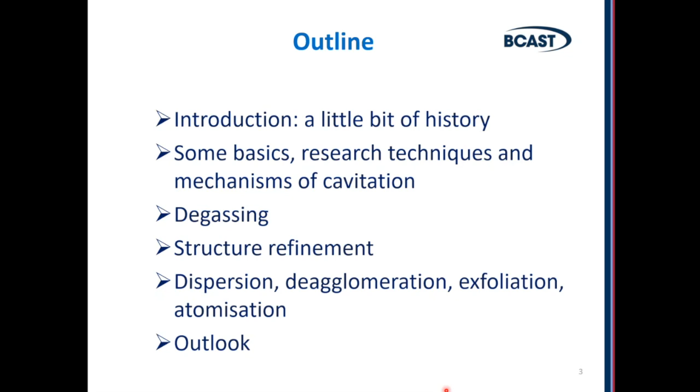Ultrasonic processing is a historic subject, studied for quite some time, but in the last 20-30 years there has been increasing interest in this technology because it offers sustainable, eco-friendly means of achieving goals which are typically achieved through additions or through introduction of some gases. So it gives you an eco-friendly way of tackling industrial problems.

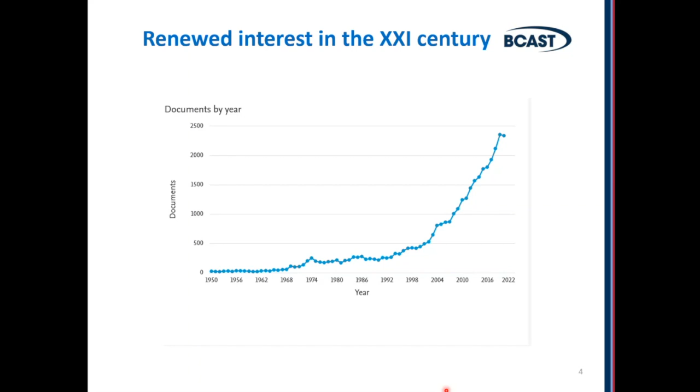At the heart of ultrasonic processing is cavitation. Cavitation, by definition, is the creation of cavities, and when we talk about liquids, it's the creation of cavities in the liquid. When the static pressure on the liquid reduces below the liquid vapor pressure, small vapor-filled cavities are formed in the liquid.

There are two major types of cavitation in liquids. One is hydrodynamic cavitation, which is famously known for damaging impellers of ships. That's usually when the water or liquid comes across a solid-liquid interface with very high speed, and at some critical speed there is a disruption, so the water cannot flow over the interface anymore, and it starts to disrupt this interface, creating bubbles.

This hydrodynamic cavitation is also used in useful applications, for example in atomizers, emulsifiers, and some mixers. Acoustic cavitation, which we mostly deal with, is a result of alternating pressure created in liquid by passing a high-frequency acoustic wave through the medium.

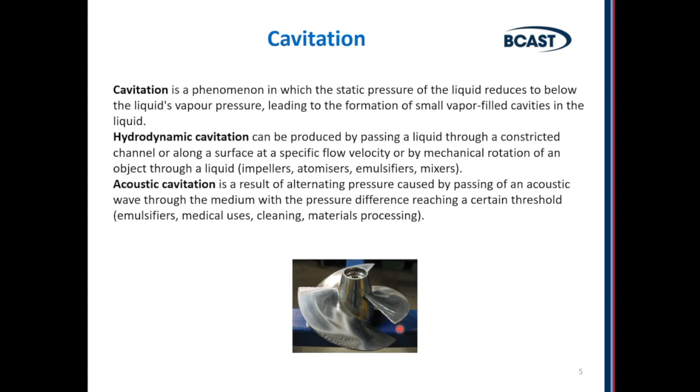This is a scientific field with a very rich history. Fundamental and practical works on ultrasonic cavitation and its applications date back to the 1930s, even the 1920s. Notably, already in 1954, there was a literature review published on the applications of ultrasonic processing to metals. And in 1981, another review was published by John Campbell on the application of vibrations to melt processing.

My father worked a lot in this field, and he published his first monograph on this area as applicable to aluminium in 1965, and since then a number of other monographs were published. So it's a historically very rich area.

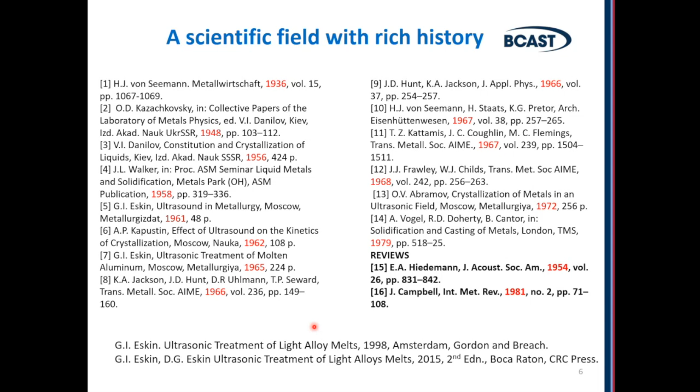So what can we expect when we talk about ultrasonic cavitation? You have a vibrating source here, which vibrates in this direction at high frequency, usually above 17 kilohertz, and when it reaches a certain power, cavitation starts. Cavitation is concentrated near the tip of the source, but it produces bubbles and a lot of mesoscopic, microscopic flows. So you can see that it creates mixing, vigorous movement of liquid, and special phenomena in the cavitation area itself.

You can see it produces noise, high frequency noise. If we talk about specific areas, we usually talk about the cavitation region, which is directly underneath the source of vibrations. It's usually roughly the size of the diameter of the probe or sonotrode, sometimes a little bit larger than that. And then there are downward flows which recirculate.

So this is experimental observations. These are PIV measurements, particle image velocimetry measurements of the velocities. And velocities in this area of the secondary flows are in the range of centimeters per second.

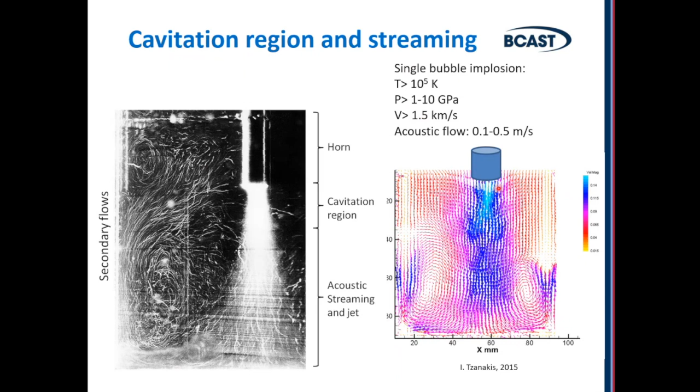And when it implodes, it creates in the center a huge pressure, which also results in a huge increase, but very short in time, in temperature. And the velocity of this implosion is around 1.5 kilometers per second. So this happens on the scale of a single bubble. But in the bulk volume, the velocities of the flow are much slower.

So what actually happens when we talk about ultrasonic processing? There are a lot of phenomena which are interesting and relevant to processing itself. First of all, we have cavitation and acoustic streaming, which was illustrated in the previous slide. And we can observe it in transparent liquids, now also in intransparent liquids using synchrotron, and we can do modeling.

Then we have the cavitation zone, which nowadays we can also observe. And we can also measure acoustic pressure in the cavitation zone and outside the cavitation zone, measuring the attenuation, because of course acoustic pressure is maximum close to the source of vibrations, but then it attenuates through the volume.

Then there are phenomena which are associated with this cavitation. First of all is degassing. So liquid usually degasses - when these bubbles are formed, they're filled with gases which are dissolved in the liquid. By that, a liquid can be degassed of dissolved gases, for example, oxygen in water or hydrogen in aluminium, and that we can measure and observe in transparent liquids.

Then it activates - cavitation activates inclusions, which creates better wetting conditions on the surface of inclusions present in the melt, for example oxides.

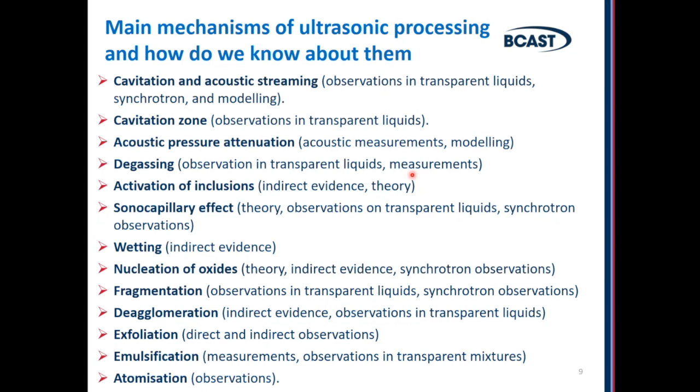In liquids, immiscible liquids like oil and water, for example, can emulsify very efficiently under conditions of cavitation, and you can also have atomization of liquid when it drops onto this vibrating surface. So these are all the phenomena and mechanisms which we use in materials processing using cavitation.

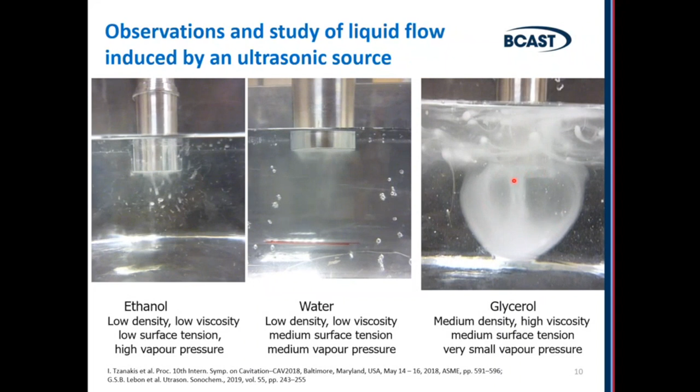So cavitation looks different in different liquids, depending on the properties of the liquid. With big bubbles, there is no well-defined cavitation zone and flows, unlike what we saw in water or liquid aluminium, where you have a very well-defined cavitation zone and flows, versus very slow processes in highly viscous liquids.

We can not only observe cavitation in different liquids, but also measure acoustic pressures using cavitometers. This is a special device which transforms mechanical vibrations of the probe into an electrical signal, and then this signal can be converted using fast Fourier transformation into a spectrum, and then calibrated to real pressures.

We can do this in water, and we could for a long time do it in low temperature liquids like water since the 1950s. But nowadays we can also do it in liquid aluminium using metallic probes. This is an example of such measurement showing attenuation of pressure in liquids. Moving from the tip of the probe, or sonotrode, to the side, you have attenuation of pressure. But you can also see that 100% power, maximum amplitude of vibrations, is not necessarily better than a smaller amplitude.

That's because you have not only attenuation of acoustic waves in the liquid, but also shielding of acoustic waves from the melt by the cavitation zone. You can imagine the cavitation zone as a zone with a lot of bubbles, so you don't have a continuum liquid medium anymore, but a bubbly liquid. Bubbly liquid attenuates, or absorbs, acoustic energy very quickly. So if you have a very well developed cavitation zone, a lot is happening inside, but not much going outside this zone. All the energy is consumed within.

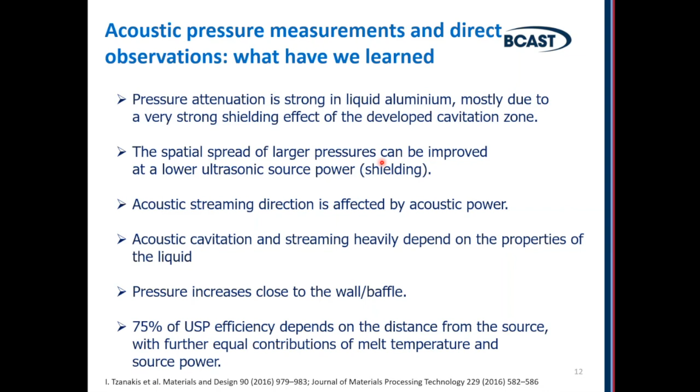We may have a very strong shielding effect if the cavitation zone is very well developed. We now know how this shielding and attenuation happens in real liquid melts, and we know that acoustic streaming, these secondary acoustic flows, are affected by acoustic power. We can draw a lot of practical solutions from these measurements which we can apply in liquid metal processing.

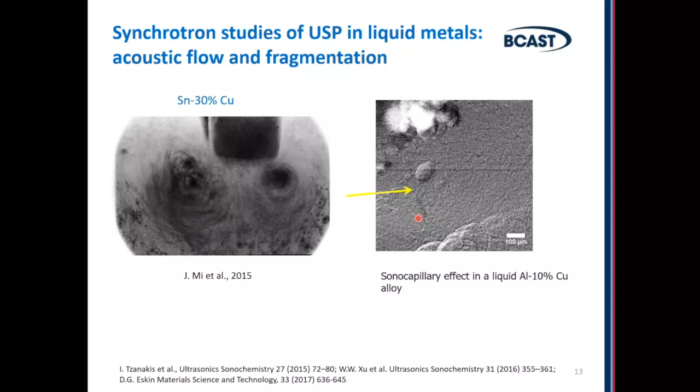So we have now reached the means to study cavitation processes.

Sorry, what I did—I pressed end. It's not end yet, let me go back. I'm very sorry, I pressed the wrong button. I will just need to go. Oops, what happens?

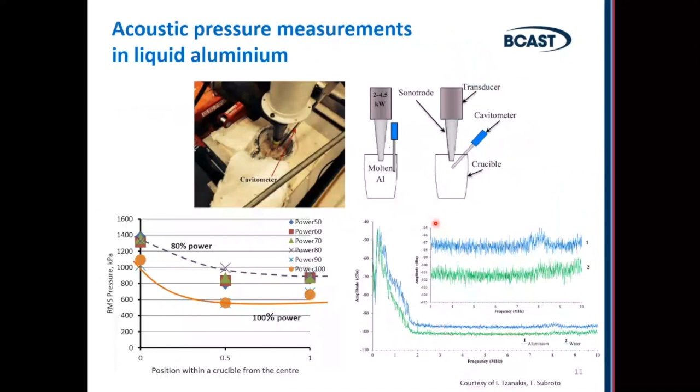From these in situ observations we learned a lot. We've confirmed some concepts we knew before, like the sonocapillary effect, but we also observed shock waves in liquid metals, and liquids generally, for the first time. We can also see how cavitation interacts with solid particles floating in the liquid, and what we can expect from this interaction.

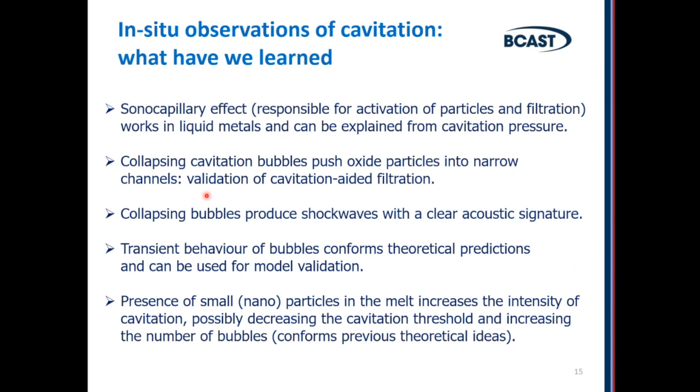One of the major applications of ultrasonic melt processing, as applicable to liquid metals and specifically aluminium, is nucleation. We want to refine the structure of the solid metal by assisting nucleation of solid phases during solidification. Of course it starts from nucleation—the more nucleants you have, the finer the structure. So there are a number of hypotheses and theories on how cavitation can assist nucleation.

One fundamental idea is cavitation-assisted homogeneous nucleation. As I said before, when a cavitation bubble collapses it produces a lot of pressure inside, and this pressure creates undercooling. The increased pressure upon bubble collapse increases the melting point of aluminium by about 60 kelvins, which means that effectively, relative to the ambient temperature of the melt, it is locally undercooled by about 60 degrees—which is a lot. That creates homogeneous nucleation sites.

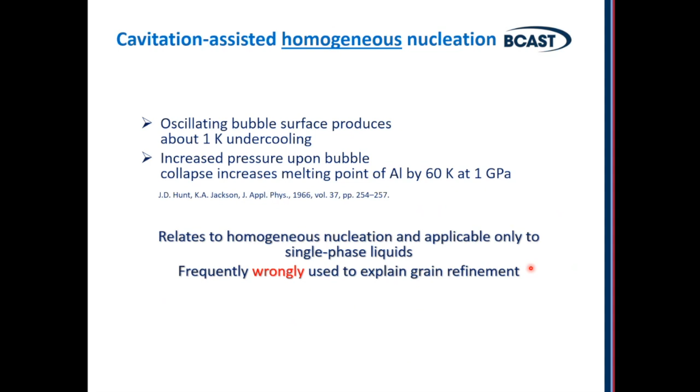But in liquid metals, homogeneous nucleation almost never happens, so you cannot use this explanation for explaining grain refinement in real melts. So here we talk about heterogeneous nucleation, which happens on substrates present in the melt.

Typically, if we talk about aluminium, but also steel is the same, these are oxides, carbides, borides with sizes of a few microns. What cavitation does is first clean the surface of these particles from whatever contamination is there, and also, very importantly, from adsorbed gas on the surface, allowing access of the liquid metal to the surface of these particles.

It also promotes wetting and filling of small surface defects via the sonocapillary effect. These wet particles, especially if they have a good crystallographic match with aluminium, become active and can serve as a substrate for the solid phase to be formed.

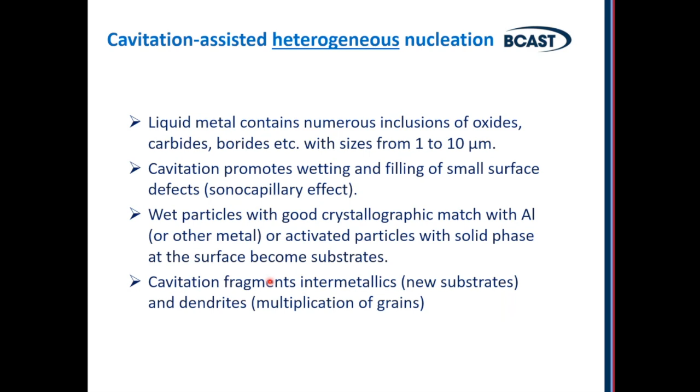On top of this, cavitation fragments intermetallics and dendrites, and by that creates new grains, new substrates, which also assists in grain refinement.

Activation of substrates is very difficult to observe and prove experimentally, but indirectly we can say that frequently, if we treat our melt above the liquidus in a relatively wide temperature range and then solidify the material, we frequently find oxide inclusions inside intermetallics, which indirectly shows that these intermetallics were nucleated on these oxides.

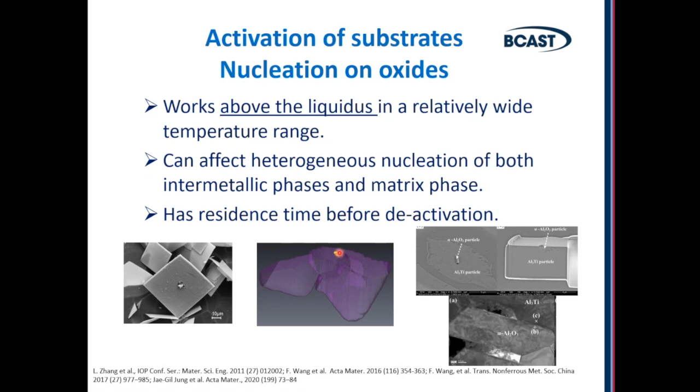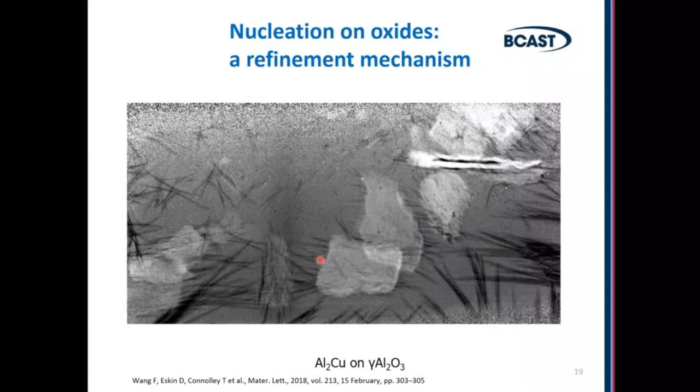We also have very interesting evidence from synchrotron studies where we see that intermetallics of aluminium and copper are nucleated on aluminium oxide after the melt was processed with ultrasound. This is direct evidence of nucleation on oxides. If there is no cavitation treatment before, these oxides remain inert, they are not wetted by liquid aluminium, and so there is no nucleation.

Fragmentation is another powerful means of grain multiplication, grain refinement. It always works, but only below the liquidus, because in order to fragment something you need to have that solid phase present. So if you talk about fragmentation of aluminium dendrites or intermetallics, you need to do it in the temperature range where this solid phase already exists.

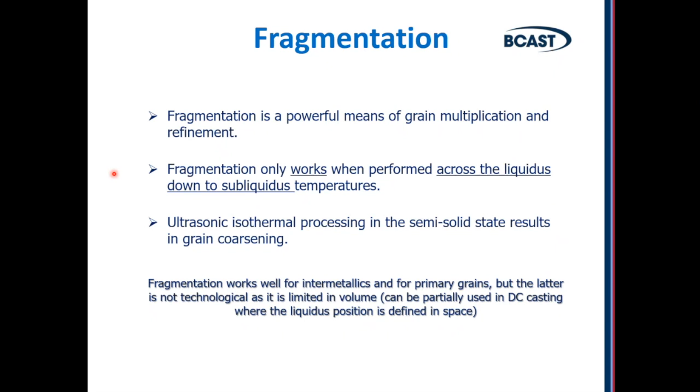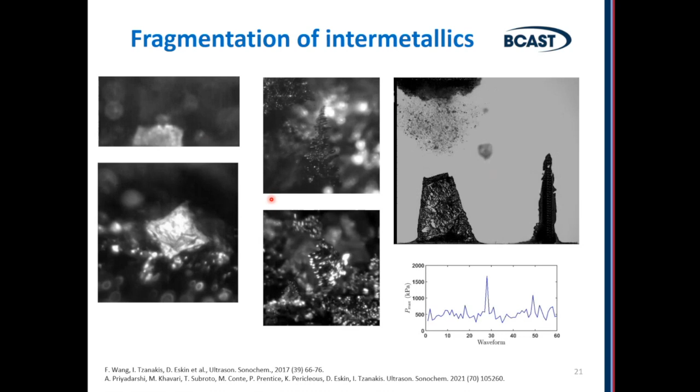And it works very well. We had a lot of in situ observations of how cavitation can fragment intermetallics—you can see here and here, basically by crushing it. The only interesting thing is that it doesn't happen instantaneously; it's actually a kind of fatigue mechanism, a high frequency fatigue mechanism.

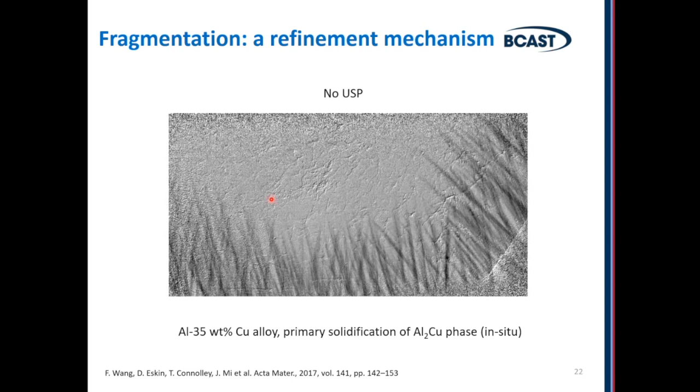This is an example of an aluminium copper alloy studied with synchrotron imaging. Without ultrasonic processing, you can see huge elongated, needle-like intermetallics formed. When you do ultrasonic processing, with the ultrasonic source here, the flows detach some of these intermetallics and bring them back into the cavitation zone. We don't see the cavitation zone in this frame, but they're going to the cavitation zone here.

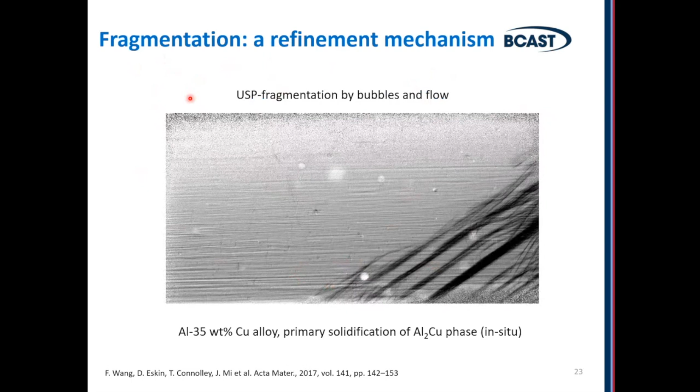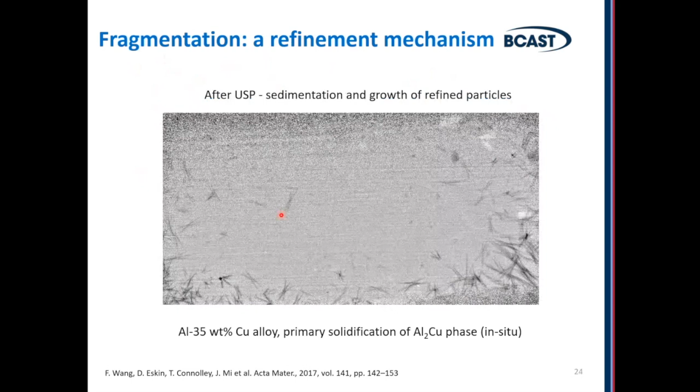Then when you switch off ultrasound, that's what you have: these fragmented intermetallics sediment and create a much finer structure. That's what happens also in real alloys when we process them with liquid metal ultrasonic cavitation.

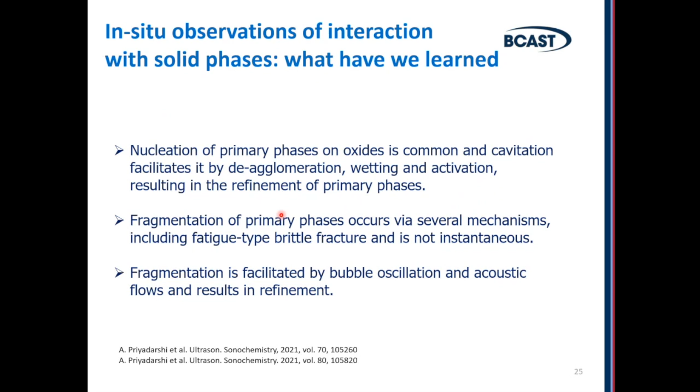So we learned a lot from these in situ observations. Some of these observations are quite unique to date, but we learned a lot, and we continue to work in this area. It's a very scientifically rich area of research. Another thing is deagglomeration.

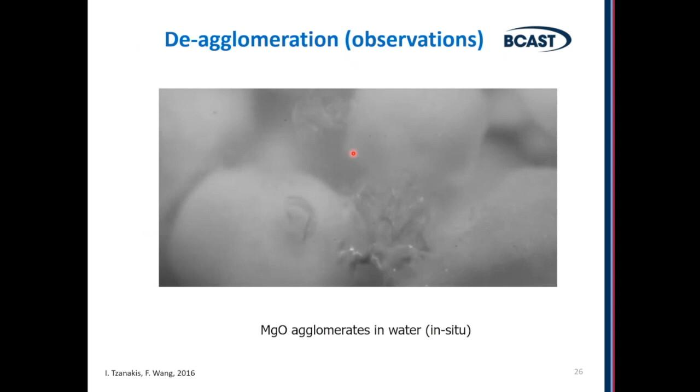If you have agglomerates of particles, like when you add particles into liquid aluminium to make a composite material, they tend to agglomerate. What cavitation does is the cavitation bubbles scrub the surface of these agglomerates and deagglomerate them. So instead of having big chunks of agglomerates, you have individual small particles released into the liquid.

What is important is that because it's a gradual process, it takes a long period of time. So if you want to make nanocomposites by adding nanoparticles into aluminium melt, you need to allow some time, 10, 15, 20 minutes, for the process to happen. If you try to do it in 10 or 15 seconds, you will not be able to achieve the result because of the mechanisms of deagglomeration.

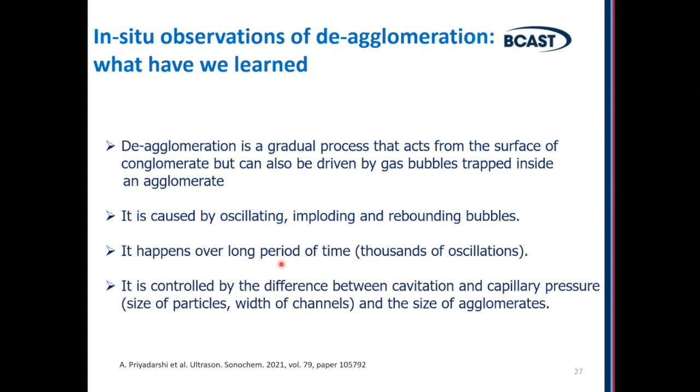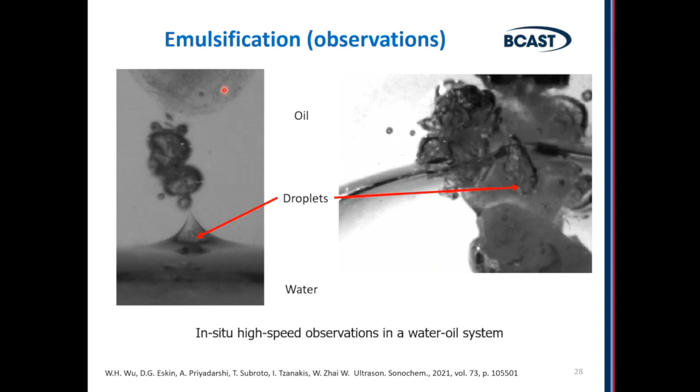We also have emulsification assisted by cavitation. Here's an example of oil in water—you can see the cavitation zone here spreading. This is a very high-speed observation, and here the emulsions start to form.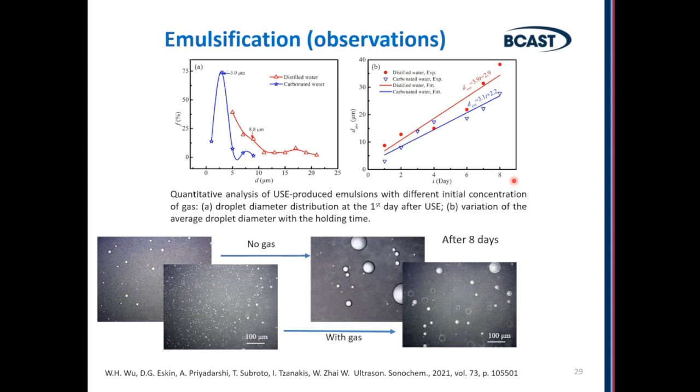Here, emulsions start to form. We also looked at the positive effect of dissolved gases, which will enhance cavitation, and also by that enhance emulsification.

Another very interesting recent application of ultrasonic cavitation is exfoliation, for example making graphene. We had a good project on that, and we observed and achieved very efficient exfoliation of graphene in eco-friendly solutions like water, or water ethanol solution, which makes this graphene suitable for biomedical applications.

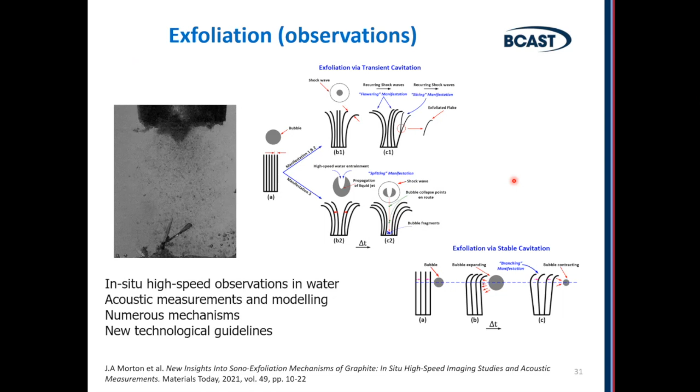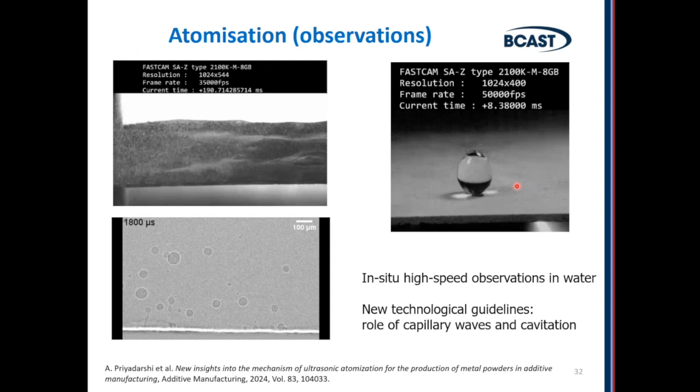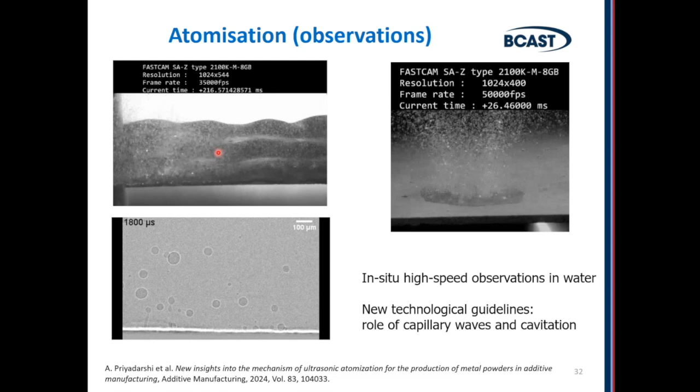Yet another application is atomization, which may be interesting for people who work in additive manufacturing, because ultrasonic atomization is one of the means to produce good quality powders for additive manufacturing. Here you can see a vibrating plate, and how droplets or layers of liquid metal, or liquid, in this liquid, atomize when it touches the vibrating surface. There are mechanisms associated with that. We published and are currently publishing papers on this, which is quite a scientifically rich area.

Let's now talk about applications. So we talked about mechanisms, some fundamental mechanisms. What are the applications of ultrasonic processing? Again, there is a history behind this.

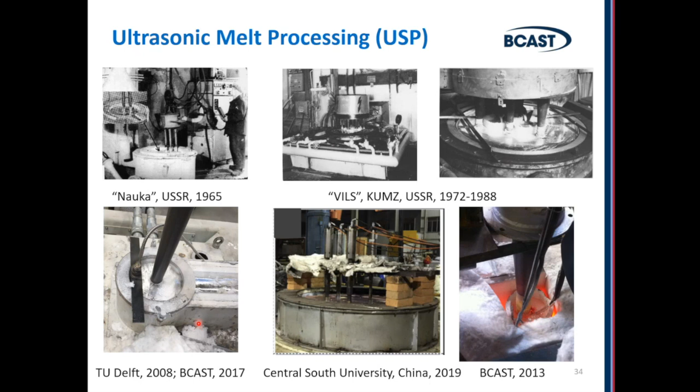We know that there were examples of industrial scale applications in the 20th century: 1965 degassing, and in the 1970s and 80s application to large scale direct chill casting, producing billets and ingots from aluminum alloys. These works continue now in China, for example. This example shows very similar experiments in DC casting in China. We work more on fundamentals of this, or technological development of this processing, so smaller scale, but we do this research in BCAST here, also during DC casting.

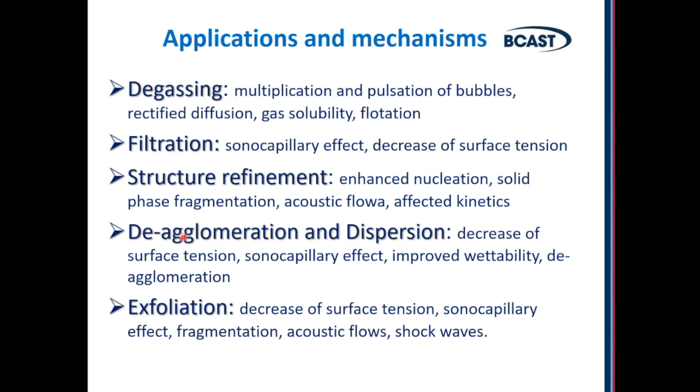So what are the applications of ultrasonic processing to processing liquid melts? Degassing, filtration, structure refinement, deagglomeration, dispersion, especially for making composite materials, but also for improving the efficiency of added grain refiners, and exfoliation to make 2D materials.

Let's talk about degassing. Degassing was one of the first applications of ultrasonic processing, dating back to the mid-1920s for the degassing of liquid glass. Of course, in glass, degassing is important because you don't want to have glass with bubbles. But in application to liquid aluminium, it probably dates back to the 1960s and is still a developing area with new equipment available.

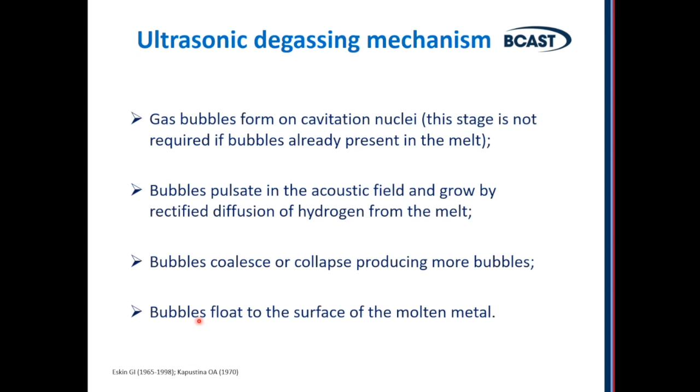So the idea is that you create cavitation bubbles. They're filled during their pulsation with dissolved gases. Then they grow, absorbing more and more dissolved gas, and then they float and release the gas into the atmosphere. So this is degassing. It's very, very efficient.

There are also processes of partial degassing, or really deep cavitation degassing, and depending on the level of gas which you achieve in liquid metal, you can have either stable degassing effects, so that the liquid metal can stay there for minutes or probably even hours before casting, with this lower level of hydrogen.

But if you want really to have a very pure melt with almost no hydrogen or very low concentration of hydrogen, and you achieve very deep degassing, you need to be aware that you need to use the melt right away. Otherwise, it will regas and absorb hydrogen from the atmosphere.

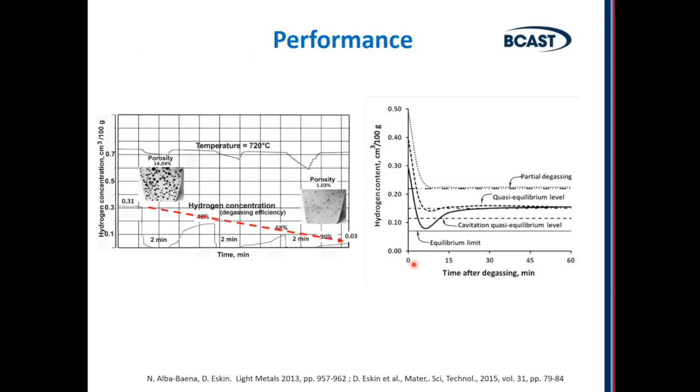Hydrogen comes into liquid aluminium from moisture. So humidity in water, in air - H2O - reacts with aluminium to produce aluminium oxide, which remains on the surface of the melt, and hydrogen, which is dissolved in aluminium. Liquid aluminium can dissolve a lot of hydrogen, but solubility of hydrogen is very low in solid aluminium. So during solidification, if you don't extract hydrogen, you will have porosity, which you don't want, of course.

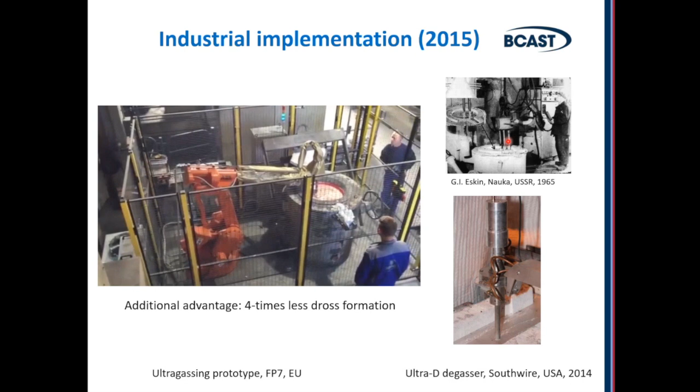So practical applications of implementations of degassing: this example of a European project which we had a few years ago, ultrasonic degassing of roughly half a ton of aluminium in a foundry. This is also an example I showed - this is degassing back in the 1960s in foundries.

You can see the difference here in multiple sonotrodes. Here we use one sonotrode, but it's moving, which is a technological advance. This is an example of a degasser from the company Southwire, United States. They use combined cavitation with nitrogen or argon flow, so it's not purely ultrasonic degassing, but more carrier gas degassing enhanced by cavitation.

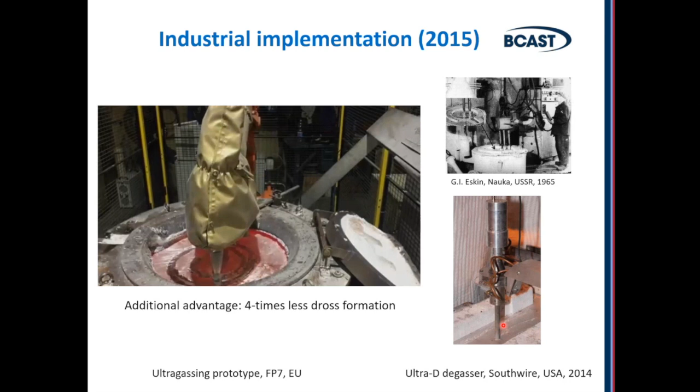Another major application, which is very important and has attracted a lot of interest, is structural grain refinement. So you can go from relatively large grains in solid metal to very fine grains. This is a very historically rich area - it dates back to the 1930s, and a lot of work was done in the 1950s, 60s, 70s, 80s, and is still going on.

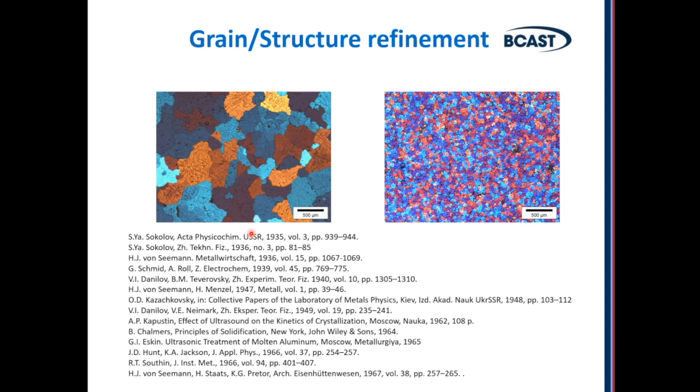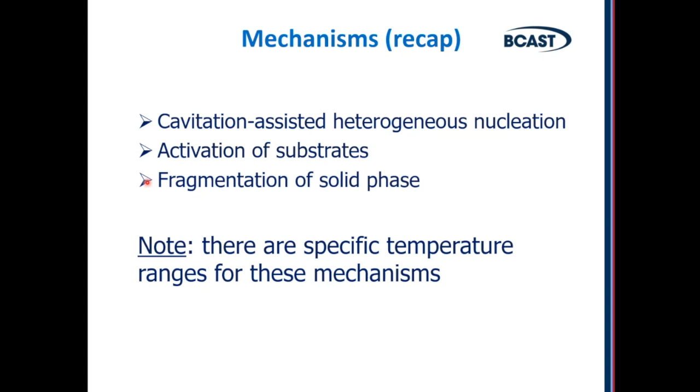So the mechanisms are cavitation-assisted heterogeneous nucleation through activation of substrates, and also fragmentation of solid phase. Note that there are specific temperature ranges for these mechanisms. For one, you need to treat above the liquidus. For the other, you need to treat below the liquidus. This way you can achieve refinement of primary phases, primary intermetallics.

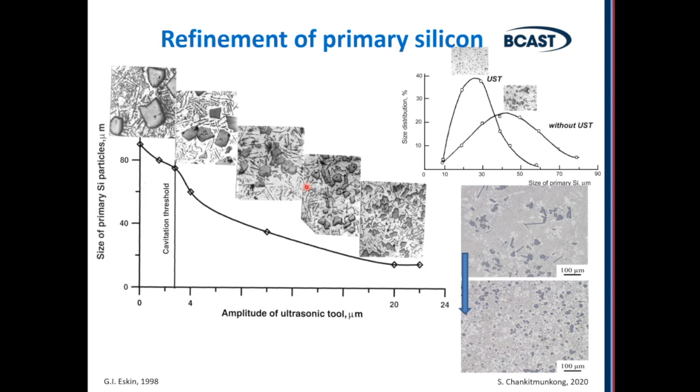This is an example of aluminum-silicon hypereutectic alloys, piston alloys, usually 12 to 18% silicon, showing very efficient refinement of primary silicon. Also primary intermetallics of other origins—aluminum-3-titanium, aluminum-3-zirconium, aluminum-3-iron—can be efficiently refined. By refining intermetallics in hypereutectic aluminum alloys, you can achieve a structure which allows these alloys to be used, because alloys with such intermetallics otherwise cannot be used if the ductility is almost zero and fracture toughness is very low. But if you refine these intermetallics, you can actually start to use these alloys.

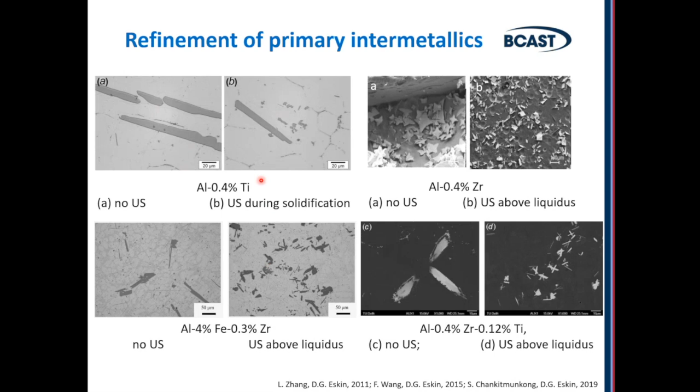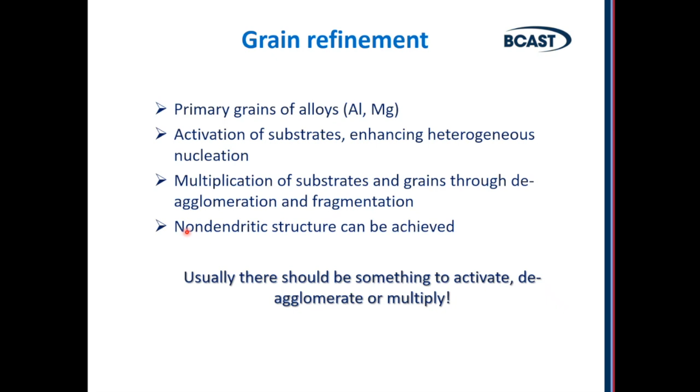So when we talk about grain refinement, that was refinement of primary intermetallics or primary phases. If we talk about grain refinement, we talk about primary grains of base materials, so aluminum or magnesium. Here we want to activate substrates, multiply nucleation points, and you can actually achieve non-dendritic structure if you have excess of solidification sites. What we suggested a few years ago, and still use, is to combine these two approaches.

You can refine primary intermetallics by activation of substrates and refine them to such a size that these intermetallics start to serve as nuclei for aluminum. This particular example is the aluminum-3-zirconium phase, which we refine from coarse intermetallics to very fine intermetallics, which then by their size and chemical or structural properties serve as very good nuclei for aluminum. You can achieve very good grain refinement by this kind of two-stage mechanism.

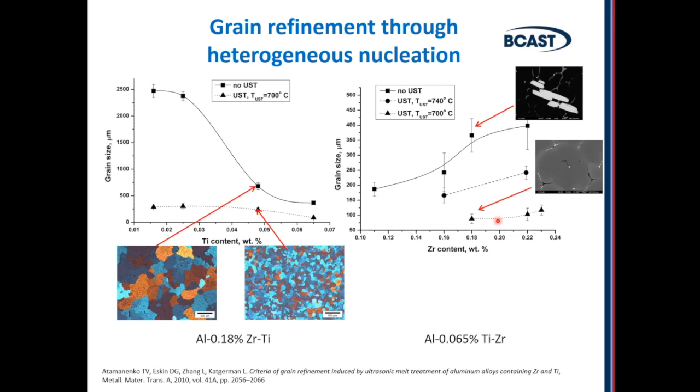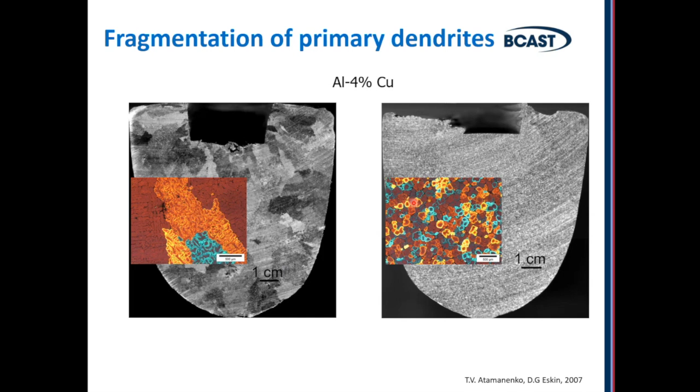Fragmentation of primary dendrites works always. If you do ultrasonic processing during solidification, it always works, but the problem is that you're very limited in volume, because if you go to the semi-solid material, the volume which you can treat is very small. There's a lot of solid material around, so there's a lot of attenuation of the acoustic waves, and you're confined to a very small volume, so practically it's seldom used.

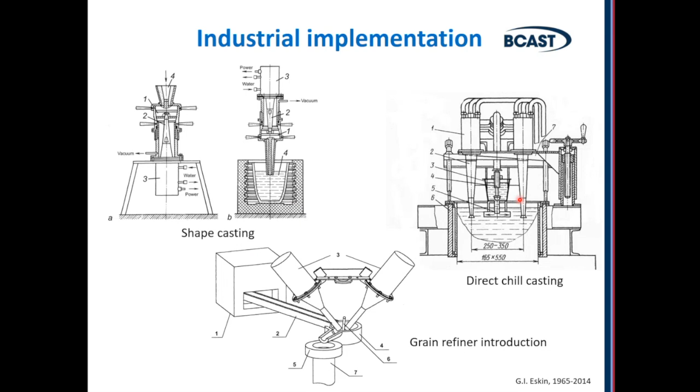There are a lot of schemes of practical implementation of ultrasonic processing in shape casting and direct chill casting. These examples show direct chill casting for aluminum alloys with multiple sources of ultrasound in large molds.

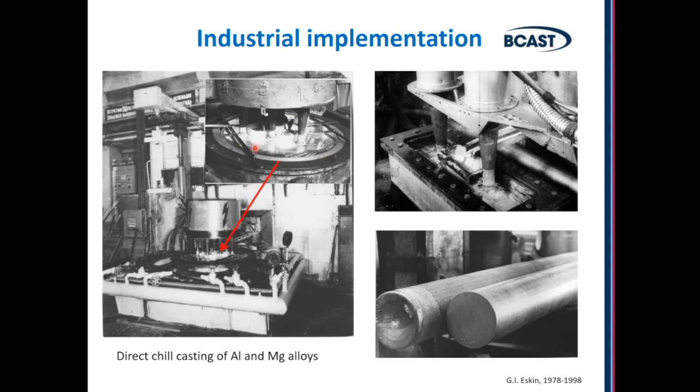We work a lot on this in terms of technology development. The basic principles were known and the results were achieved, but now we know much better about what happens inside via modeling. We know how cavitation, how ultrasonic processing, changes the shape of the sump of the billet, changes the distribution of alloying elements, how flows are arranged, and so on—and that helps us optimize the processes.

As you saw in previous slides, here we use mostly—and most people when they study this or try to use it also use—treatment in the mold, this is the DC casting mold. So your source of ultrasound is embedded into the mold, which means that if you have numerous molds, which is currently the practice when you cast extrusion billets—you can have 28, 64 molds on one table—you would need to put an ultrasonic source in each of them, which is of course practically not viable.

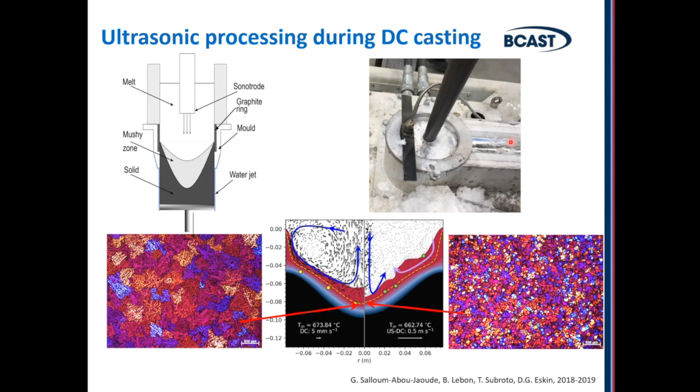So if we can move the treatment to the flow, to the trough from which melt comes into the molds, we can scale up the process. These are the results of trials where we did processing in the trough, in the launder, and we achieved quite good grain refinement by this processing. So there is a way, in our view, of upscaling this process to commercial industrial applications.

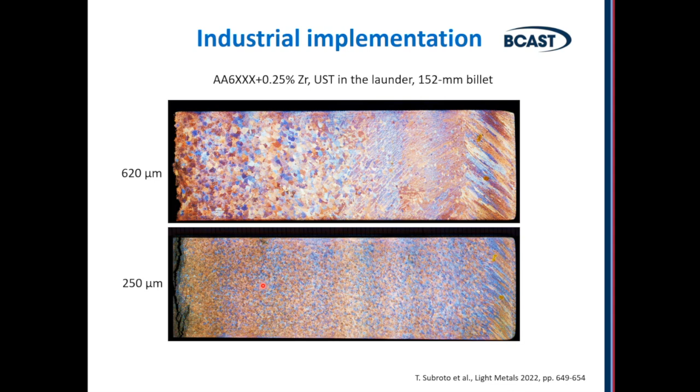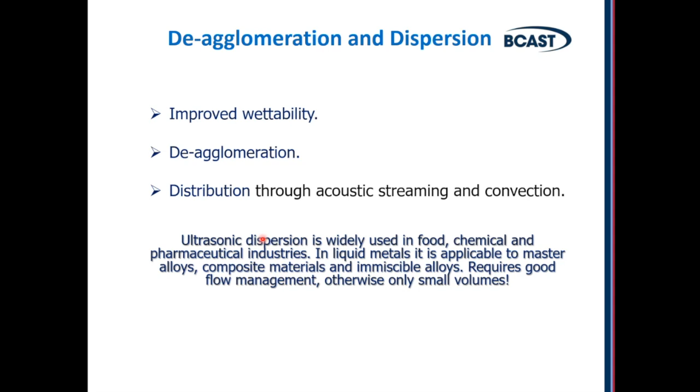When we talk about deagglomeration and dispersion, the main interest is in making composite materials. Although this ultrasonic dispersion is widely used in other areas—food, chemical, pharmaceutical industries—when we talk about metallic alloys, we talk mostly about composite materials and also master alloys or immiscible alloys.

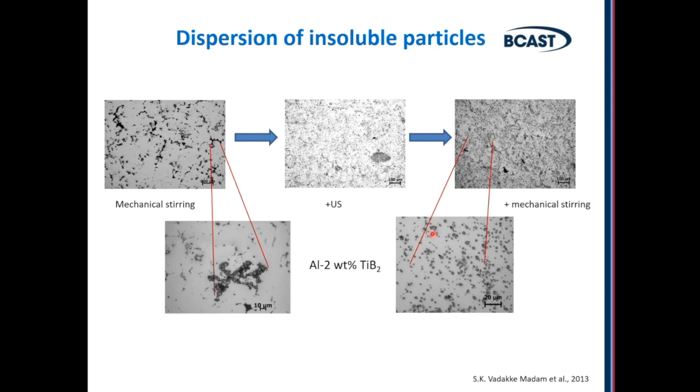If you do ultrasonic processing, you have much better dispersion of these particles. If you do both ultrasonic processing and mechanical stirring, you have quite good distribution of particles which are deagglomerated and evenly distributed in the matrix.

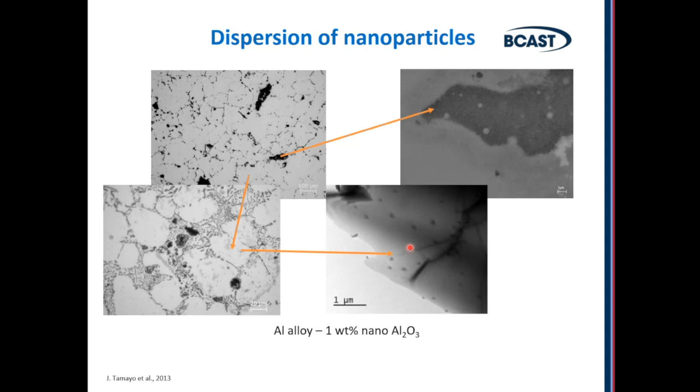With nanoparticles, it's more difficult because their specific surface is huge. They really want to stick together, but even there, with longer processing time, you can achieve deagglomeration of particles and even embed them into the matrix.

In exfoliation, I mentioned graphene. So we developed a technology of making eco-friendly graphene purely by cavitation. If you don't know, currently graphene by liquid phase exfoliation is produced using chemical exfoliation.

So you add very poisonous and harsh chemicals to water or to other solutions, and then these chemicals spread the crystal structure of graphite, kind of puffing it up, and then you use mechanical mixing or ultrasound to separate the layers of graphene.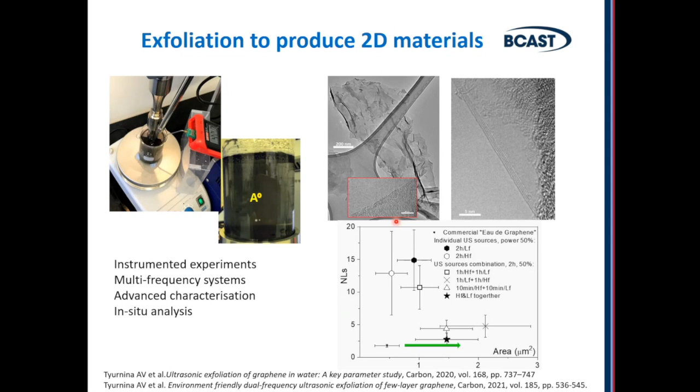Here we don't use any chemicals, and the exfoliation happens naturally only by cavitation.

And the last slide is about atomization. So we have currently a project on additive manufacturing where powders are produced not by us, but by our partner, by ultrasonic atomization, and the quality of particles is very good. And the results of additive manufacturing using these particles is also quite impressive.

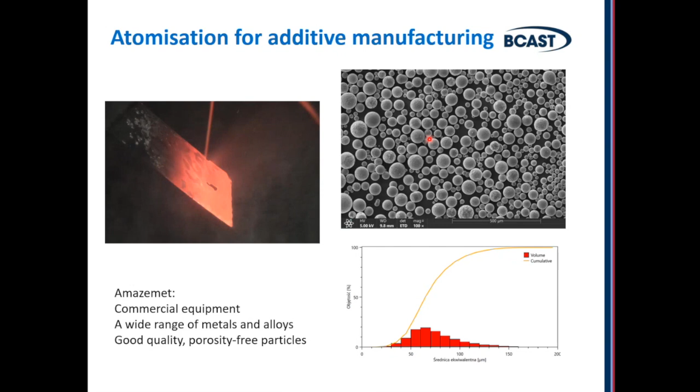But we're in the middle of the project. I cannot tell too much about that, because not much is published yet.

So to conclude, ultrasonic processing, in my view, has great potential in industrial applications. And the key for successful scaling up of applications is flow management - how you treat larger volume with fewer sources of ultrasound, and that can only be organized through clever flow management, so how flow goes, how melt goes around.

The mechanisms - currently we have means to study mechanisms, experimental means and modeling. I didn't touch on modeling, but there's a rich literature on modeling of these processes, which is developing. It's very difficult to model correctly this process because it's multi-scale and multi-physics, but it's started to emerge.

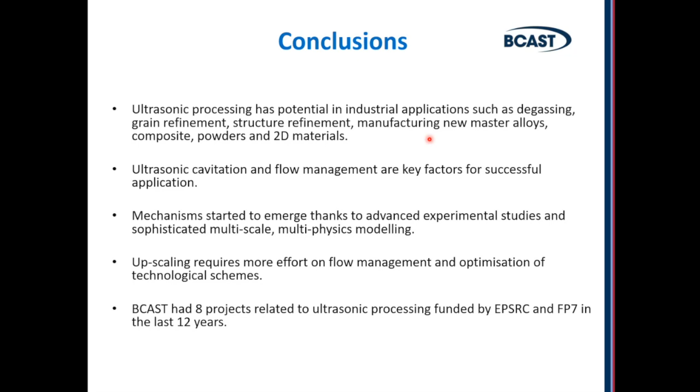We also - we're quite, because it's quite active in ultrasonic processing - we have had a few projects in recent years, and we consider ourselves as a quite internationally leading group in this area. So, and then this is the final slide, which you accidentally saw before.

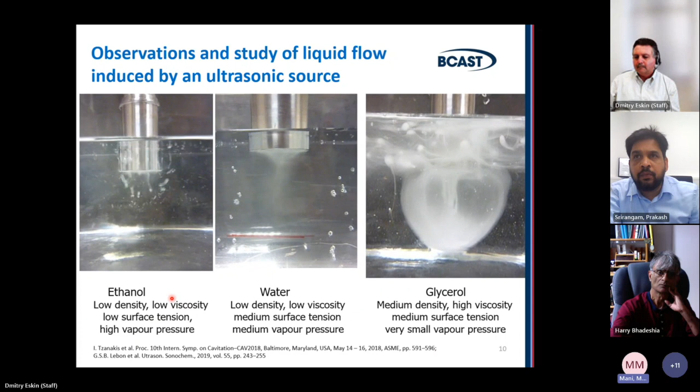Whether the viscosity of the metal plays any role in the processing. You mentioned when the cavitation happens and when it implodes, there will be a local rise in temperature. So for degassing, whether we need to account for this temperature rise and hold the molten metal such that this effect is considered. And for fragmentation, you mentioned that it has to happen below the liquidus temperature - again there will be a rise in temperature, but will this be taken into account?

Yeah, so viscosity plays a very important role. There are two parameters of liquid metal which are very important for development of cavitation and acoustic flows: surface tension and viscosity. Density plays a role as well, but if you talk about similar alloys or materials of similar density range, it's surface tension and viscosity that matter. If you have a low surface tension, bubbles created are very large, they're very easy to form. And if you have high viscosity, the process is slowed down. Actually, in glycerin, for example, you can hardly see implosion of bubbles - they are created and grow very slowly, and the flows are very slow, so everything happens like in slow motion.

So, of course, it's extreme - glycerin has very high viscosity, it's an extreme case. But if you talk about aluminium and you have aluminium alloys with different viscosities - you add some magnesium or silicon and iron, they change viscosity of the liquid metal. So viscosity affects the dynamics - if you have lower viscosity, you have accelerated processes. So if you have gas bubbles for degassing, they will rise to the surface quicker, and they also will be larger. If you have low surface tension, they will also become larger and absorb gas more efficiently.